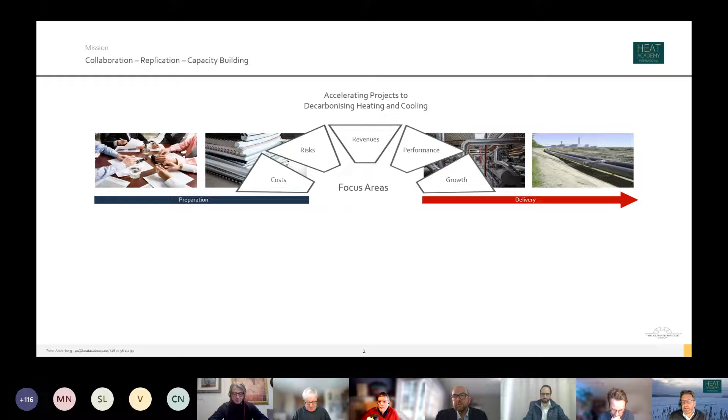The main blocks we need to address are the cost of a project, the risks, and to some extent also the revenue model to make it commercially viable. This, with our various set of services, is what we try to address, and today we are operating from this platform of training activity. So I'm going to focus on that.

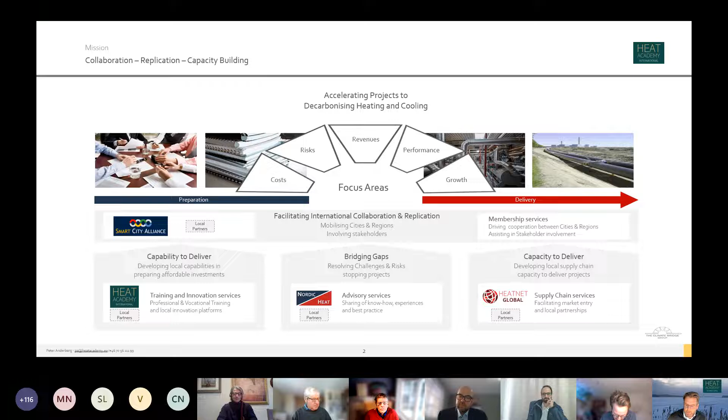Last time we looked very much at the question of why it makes sense to implement these solutions. We'll cover those questions again today to some extent. We also looked into the technology you can apply to capture heat, distribute it, and manage a heating system in a smart way. I should point out that the recording from the last session is available, along with the presentation slides we used last time, for those who are interested.

In brief, what we touched upon on the question of why is that heating is a very big chunk of primary energy consumption globally in the Northern Hemisphere. In an average city, heating is almost 50% of the total energy demand to keep the city going. In most cities across Central Europe, and I believe also in North America, this energy comes from gas, natural gas.

In many cases, you have a dependency on gas of over 90% to heat buildings in cities. And that dependency on gas for heating makes it that heating actually represents between 30 and 40% of total CO2 emissions in any city. So this is quite an important topic to address if we want to tackle the climate emergency.

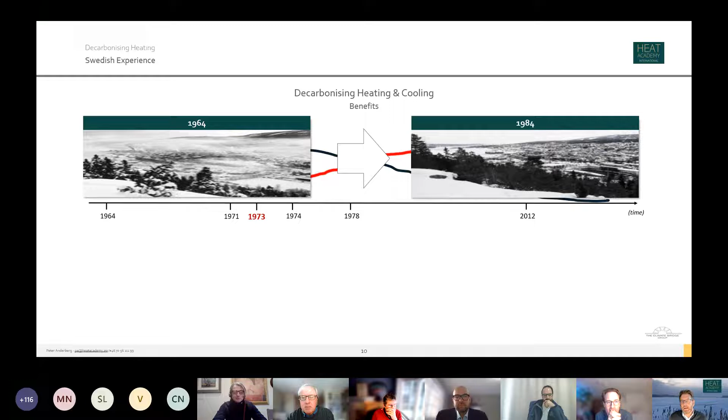This has happened before, and I'll come back to that further down the line in today's session. We had an energy crisis back in the 70s. What was done in Sweden and other Nordic countries was that we started to build heat networks, because they could address the energy security issues created by the oil crisis. But over time, we discovered there were lots of other benefits to building heat networks: in terms of balance of trade, creating local jobs, and improving the air in a community. So it was started by energy security concerns, but as we moved forward, we saw other benefits, and it has also proven to be a very profitable investment from a commercial angle.

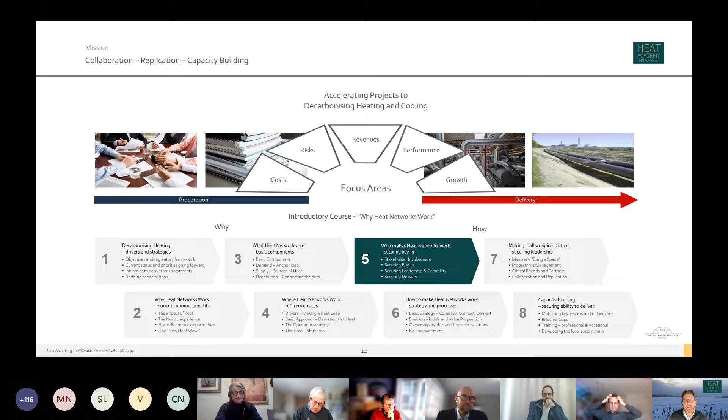Last time, we also touched upon the different technologies available at a high level, and what the best practices are - we'll come back to that in future sessions. Today, the focus is moving more into how to do this, particularly the stakeholder involvement section. To get stakeholders involved, we need to describe, in a sharp way, why it makes sense to make these investments. So we need to bring the conclusions from the last session into this one, to make a good story for why district energy is a good thing to do. This is basically what we'll focus on later in this section, which I am responsible for.

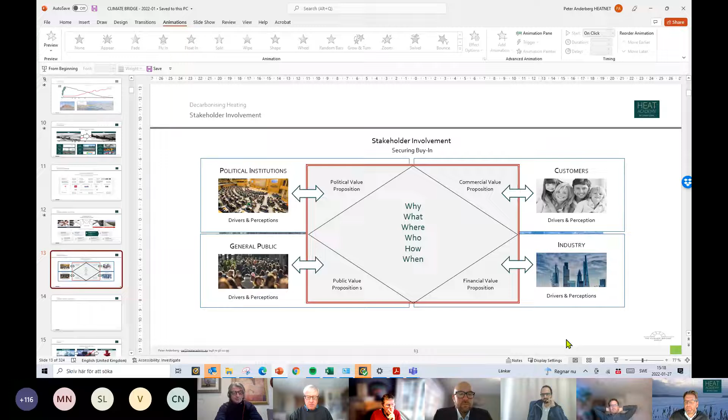But before we move into that, I'd like to introduce Jim, and step back a bit to look from a higher level again at the value of waste. So I hand over to you, James.

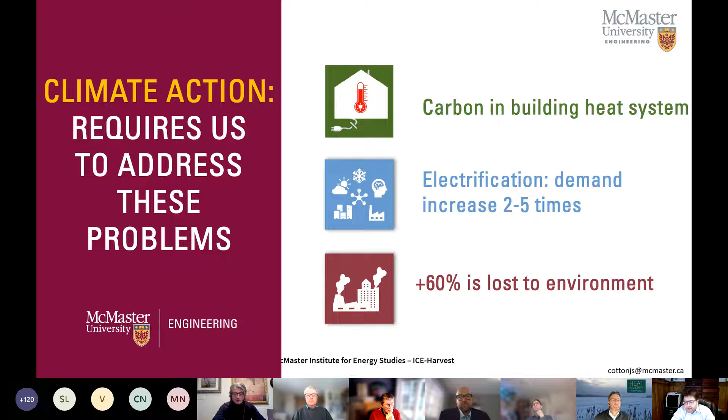That is happening at the same time as we're electrifying vehicles. But another problem is we waste more energy - more of our primary resources - to the environment than we actually use. So if we start to think about how to integrate this and look at these challenges together, we actually have a pretty good solution toward tackling this problem.

This is a slide to give you an idea of where we are and where we're going. The black line here is our electricity consumption in Ontario - it peaks in the summertime.

The red area here, that's our heating demand. It's cold, so our heating demand far exceeds our electrical demand. If you look at our peak heating demand, it's about 80,000 megawatts, and that's during those days when we have -30, -40 degrees Celsius. Compare that to our summertime peak, we're at 23,000 for the last few years.

Now let's electrify heating. I'm not going to get into this too much, but we have different COPs. Here's our average COP for, say, an air source heat pump with a seasonal average of 2. Here's an average COP of 3 — this would be a typical installed ground source heat pump. And then here's a higher one, a COP of 7.

If you look at the coldest day of the year, how is an air source heat pump going to perform? It's going to have a COP of 1, essentially equivalent to electrical resistance heating. We now have almost a 5-fold increase in terms of our peak winter demand. This is a challenge we have to address and understand. It's not just the amount of energy, it's the peak energy that we have to start thinking about and addressing, and we have to do that now.

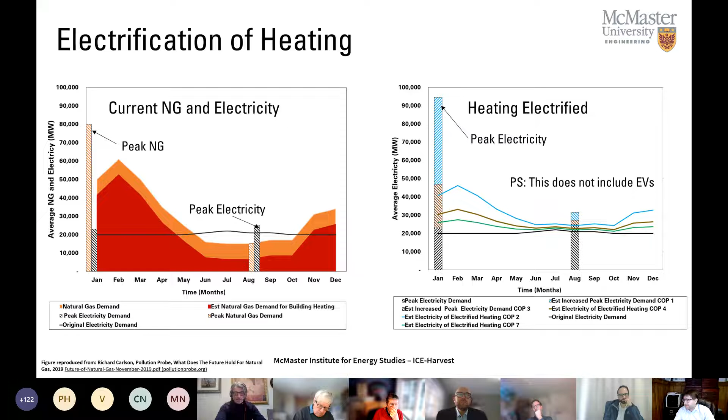By the way, this doesn't include EVs. There's an issue here — we're doing this across all sectors, and this doesn't include industry. So what happens when we include all of that?

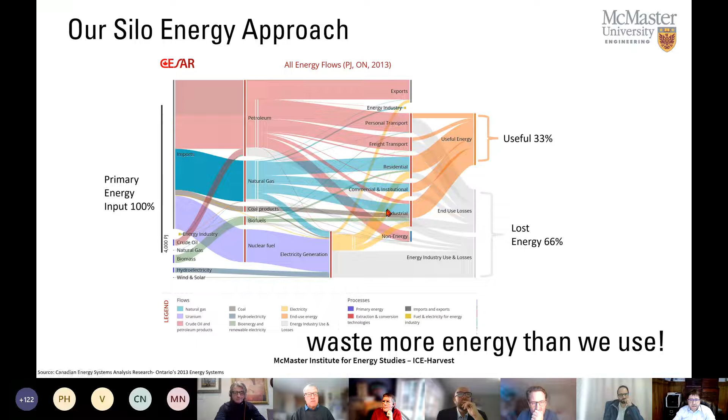Well, the other thing is we waste — we waste a lot. This is Ontario. This is sort of old data now; unfortunately, CESAR doesn't update their visualization reports anymore, which is really sad. But if you go back to 2013, it hasn't changed that much, aside from this gray line of coal being completely gone from our energy sector.

We basically used, of primary resources, 4,000 petajoules. What does that mean? That's 100% — let's just keep it at 100%. We used about 33% of that. The rest was lost to waste heat. So if we look at that and break it into numbers and relationships, those Sankey diagrams...

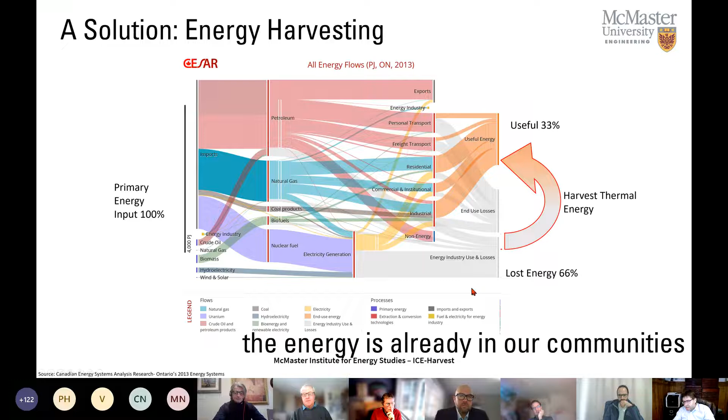Essentially, if we were able to reuse some of that waste heat, what would that mean? How much is it? What is available? We need to start mapping this. This was done from a top-down approach with our research partnership on the ICE-Harvest project, and it gives you an idea of the total waste.

If you look at industrial waste, it's definitely the highest opportunity — commercial too. We're talking 64 terawatt hours of thermal energy, 30 terawatt hours of thermal energy. In our study, we focused on these ones because these are going right into our community — directly assets we can use right now to start decarbonizing our heating using these wasted resources. Sum all of this up, and we have 130-plus terawatt hours of wasted energy already embedded in our community. Our heating from natural gas right now is about 191.

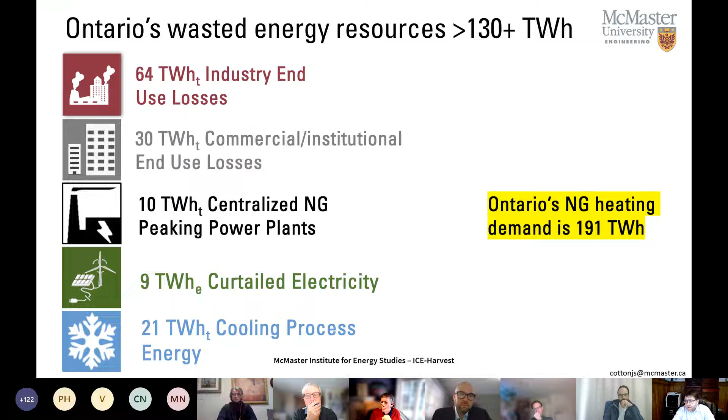You're talking right there — if we could harvest 50% of this, just 50%, you're reducing carbon emissions and going directly to our targets, essentially exceeding our targets by 2030, 2035.

Now, this payback period got a little bit worse. I did some projects with big industry partners in Hamilton, and these numbers started to creep up to 2.5 to 3, and it was harder to do. But what we did is a full energy balance on the entire plant, and what we found was, yes, there's high quality energy with good payback periods.

What really incentivized them was not the payback period, because of the huge capital cost up front for some of these projects, but the increase in productivity that led to better resource allocation and better quality in terms of their products. That's some of the things you could do with heat recovery.

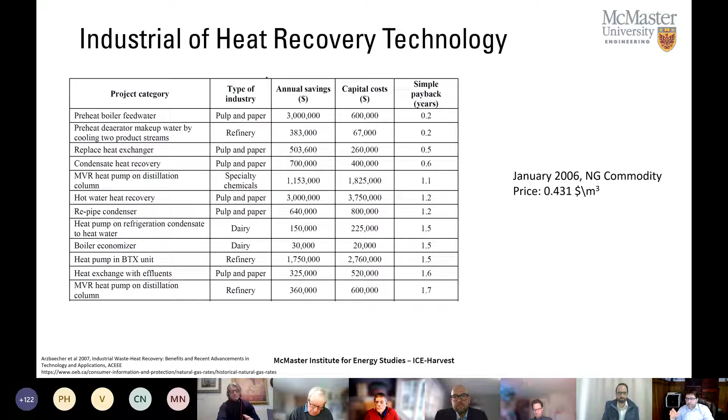One thing we did for a strip mill was investigate preheating their ingots before they went into the furnace. Instead of letting them cool down, keep them at 200 to 300 degrees Celsius. Right off the bat, it's about 15 to 20% savings, with a good payback period of about 3 years. But what really sold them on it was the increase in quality and productivity. In fact, they hired the student who worked on that project to continue working there.

Another one I'll mention is my own company. Look at the commercial side and think about how much we waste—this is far worse than any other process we've talked about. Look at our cooking processes.

Pizza, for example, is a company we partnered with, and they waste 90% of the natural gas—50 cubic meters a day, every day, summer, winter, fall—and 90% of that goes up the chimney. We've developed a system that integrates their electrical system, their hot water system, and even preheats the air going to the system. We've reduced consumption to about 43, and now only 40% of the waste goes up the chimney. This has a payback period of about 2 to 3 years.

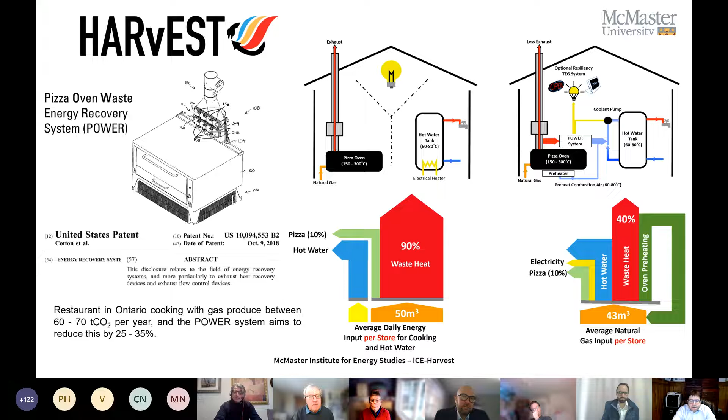And this is 2 to 3 years at prototype costing, not commodity or high volume costing, so it's still a challenge for them to do. But what we've proposed now is a rental energy sharing model, and this has really taken off. We look at a 10 to 15 year lifespan of the product—if we're able to install it for free, this is something they really think is going to happen. This services markets that typically can't afford high quality, expensive materials to do this energy harvesting.

Now, what is motivating this? Well, we don't have the same problems as Europe—our cost of natural gas is fairly inexpensive. The number I showed you before, the 2006 numbers with about a 1 to 2 year payback period, we're only now in 2025 going to be hitting that, and that's really thanks to a carbon tax. So if you're stressed about a carbon tax, just think about 20 years ago, before fracking, and the cost of energy then.

Here's our projected carbon tax, our delivery charges with inflation, our projected natural gas commodity costs—not expected to go up much—our HST, and here's another price on carbon. So we're looking at essentially doubling the cost from where we are by 2030, and we have some significant motivation. If you think about a 1 year payback period in 2025 using the 2006 numbers, we're getting into fractions. So right now, it just makes sense to do this.

But this also has implications on our home heating systems. And if we want to really target carbon emissions reductions, we have to think about how to do that. I'm going to give a very brief introduction—many of you have probably seen presentations from me on the ICE-Harvest system.

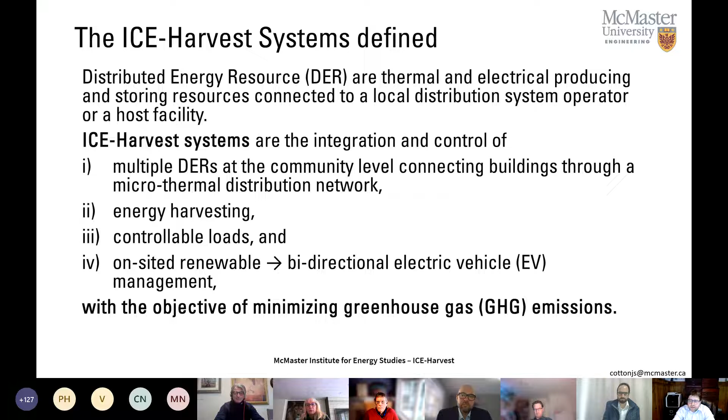That's really the opportunity. So this is a rendering of the ICE-Harvest system. It's very similar to a 5th generation district energy system, but much smaller. The key difference is that we vary the temperature of the system.

By varying the temperature of the system, we can fuel switch on the fly within 15 minutes to half an hour, running a CHP system as a decentralized peaking power plant during the day, following grid requirements rather than site requirements. So you're offsetting central peaking power plants that are 42% efficient, replacing that with something 80% or higher efficient, and delivering heat through a microthermal network.

Our goal is to export energy so we can support the rest of the community's high intensity loads, especially as we start to electrify our vehicles and geothermal systems in the neighborhoods around us.

We could store some of this energy short term. Then at night, when we turn off our CHP, we reduce the temperature of the system and electrify heating using heat pumps. These heat pumps could be bidirectional. For an arena constantly dumping thermal energy, we could capture that and put it into our system. So we do direct heat exchange during the day to save electricity, and heat pumps at night increase the electricity use 2 to 4-fold.

So now we have control. We're creating these loads - this arena could share energy with the pool next door, or with this community center. Community centers or libraries have data centers, and we'll integrate the data centers. There may be certain times they're using energy to heat the building, or internally taking the waste heat from their data center and heating the building. But if there's too much, give it back to the community.

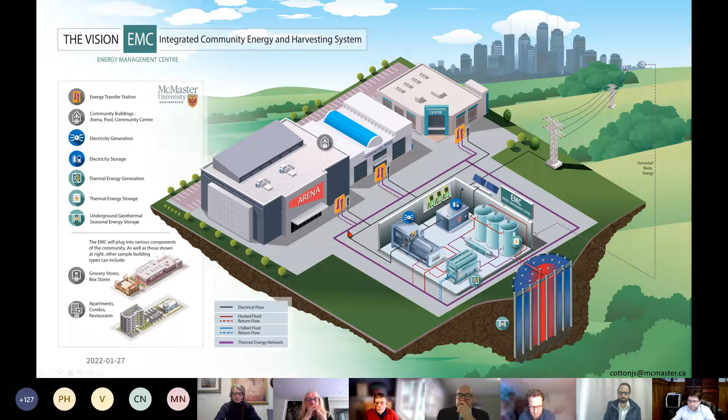Here's an example of a community campus. It's only 4 buildings, maybe 5, since we know they're going to be building a couple condo towers just down the street. The diameter is less than 1 kilometer, about 1.5 kilometers if you include the condo tower. We have an arena that's dumping energy, and a library dumping energy all the time through the cooling towers.

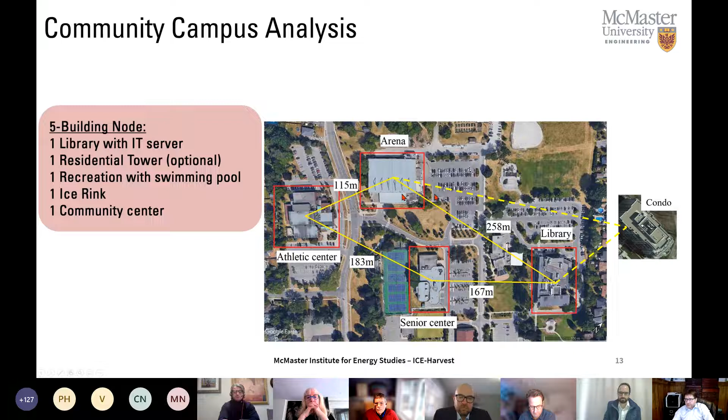So if we just put this microthermal network in play and integrated this, what happens? Well, your business as usual carbon emissions is about 2,200. If you just start sharing energy from those 2 buildings, it goes down to 1,300. We add a CHP system and operate it as a peaking power plant - we can play with that, doing it behind the meter or in front of the meter - reducing that down to...

870. Now we go one step further. Let's add seasonal storage - now we're down to about 65% less than the business as usual case. If we look at all the sites in Ontario we've identified through publicly available data, not even including industrial waste heat, just to be clear, we can basically reduce carbon emissions by 2.1 million tons. That's a significant amount.

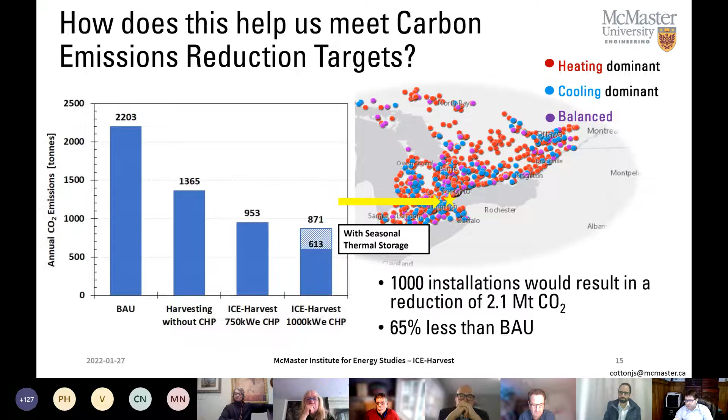And if you look at our targets to 2030, that's completely doable. Now, how much is that? It's about 1 gigawatt of installed capacity, averaging about 1 megawatt size systems. It seems like a lot, but that has already happened over the last 15 years in Ontario - we have CHP systems running 24/7 behind the meter, essentially doing the same thing.

Now, the next phase of our research project is really looking at mapping the additional opportunity around waste heat. And this is a study - sorry, I have to put the reference on it. I forgot, or it didn't.

It's not on this slide, but I'll have that in the slides when they're available, from Rotterdam, Netherlands. I love it, it takes forever to explain, but something I want to do eventually - essentially this is your heat map.

So the blue is the demand, and then they're looking at opportunities for non-carbon based solutions. So we have solar thermal roof collectors, they're looking at road collectors, point sources, and then geo exchange systems, all mapped to the city, and looking at suitable storage.

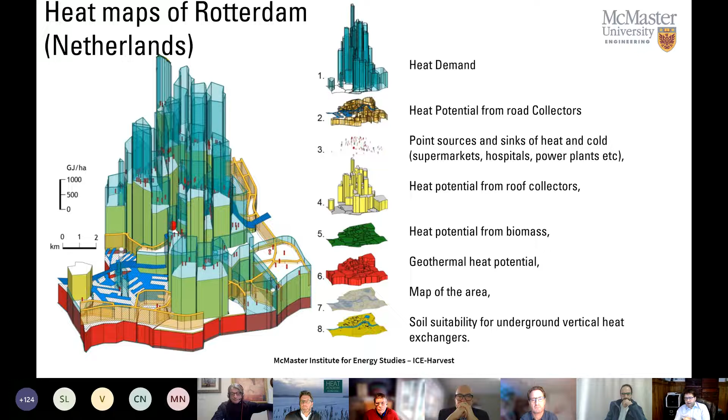We need to start doing this in Ontario. We need to map out, in particular, our point sources and our loads and show where these networks belong. They don't have to be monstrous district systems. We have a built city, but if we started doing these microsystems, eventually they will connect.

So the ICE-Harvest system is actually a grid modernization asset, not necessarily a district energy system. It focuses on harvesting, it focuses on sharing, it focuses on electrification, but it's really a DER asset that I think should be controlled as a grid level asset.

And that really brings us into this distributed system operating model, where a lot of it is controlled by our LDCs. As we get more and more DER assets within our communities, they need to be managed, and I think the most logical is through a distributed system operator and our LDCs. It also provides resiliency, and I think there's going to be significant value to that moving forward. We've seen this in Western Canada, floods, fires, and we've seen this in Burlington, so that's a key element.

And then it provides ancillary services, right? We're a dispatchable source, dispatchable load. You have ancillary services such as power frequency control.

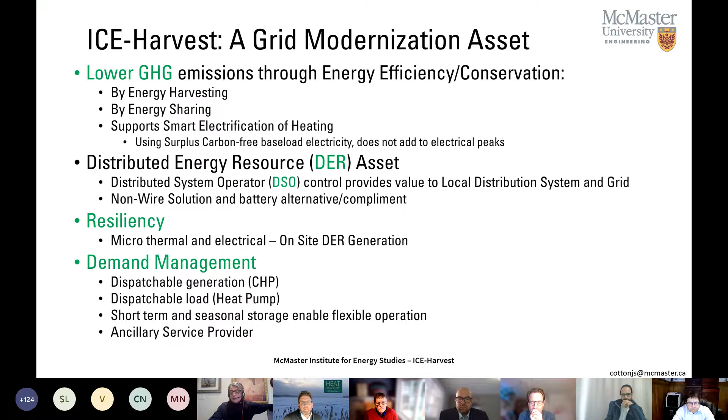So final remarks: energy harvesting is critical. These thermal networks and realizing the opportunity to share your energy - which I know doesn't really happen yet - sell your energy through micro financial transactions, get carbon credits, is key. I think we really have to step up our building code, buildings need to be low temperature HVAC ready so they can harvest this solar energy, this waste heat recovery.

That's something I've talked to everybody about lately. We really need a national energy harvesting strategy. We need to map this community waste. We have to realize it's a resource and bring it together.

And finally, just as a personal note - back on December 3rd they came out with the pillars of the climate plan for 2030, and the pillars were essentially net zero electricity, net zero vehicles, oil and gas caps, and emissions. They completely left out the building sector, and as Peter said, this is 30 to 40% of our carbon emissions. I think it seriously undermines our ability to meet these targets if we don't really start focusing on addressing these goals.

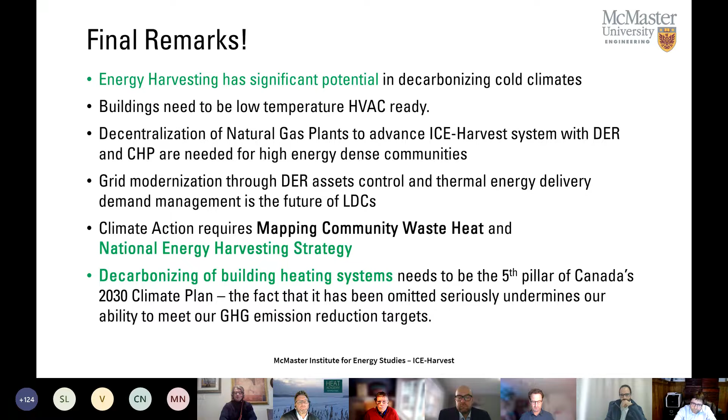Now, last, I just want to thank the team. We've had over 50 people work on this project - graduate students, postdocs - all the ones highlighted are off in industry now. Actually, I see a lot of the partners have hired these folks. They did all the real work.

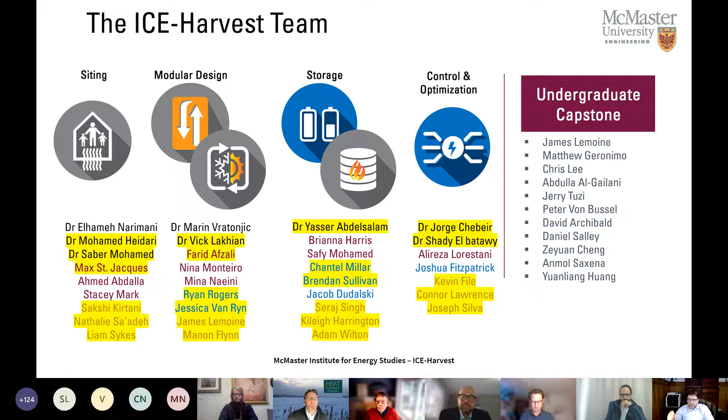And finally, my industry partners - HCE in particular has taken a big leadership role, and Grid Smart City. But to be honest with you, it is amazing - we have all sectors of energy delivery, from district systems to thermal energy delivery partners, to geo partners, and our LDC partners, all working together to make this project happen. Thank you.

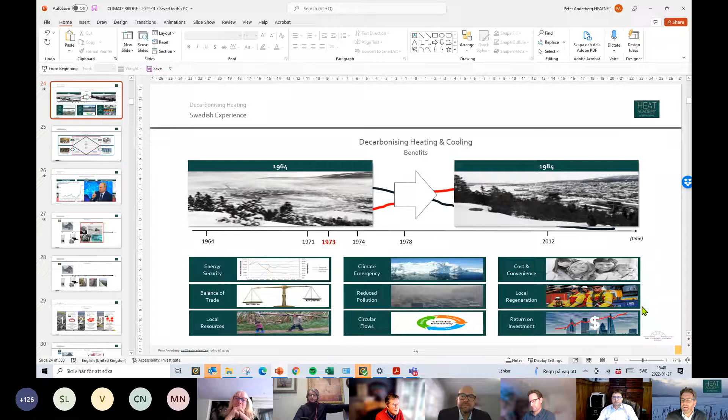As I mentioned before, we could see in the Nordic region building these kinds of systems that we've been talking about so far, with lots of benefits. They often start for a specific reason, and I'll come back to that shortly. But there were benefits that nobody could foresee - that it would be profitable, that it would be a way of generating jobs and keeping jobs in local communities, reinforcing the competitiveness of local industries, but then also having social impact.

What is interesting now is we have an enormous energy crisis in Europe emerging, and costs have gone up dramatically in recent months. Those connected to district heating in Sweden haven't been affected at all, because all the heat used for heating buildings comes either from waste heat sources, industrial waste heat, or biomass. That's an interesting aspect, that this is a way of creating less turbulence in your cost of energy.

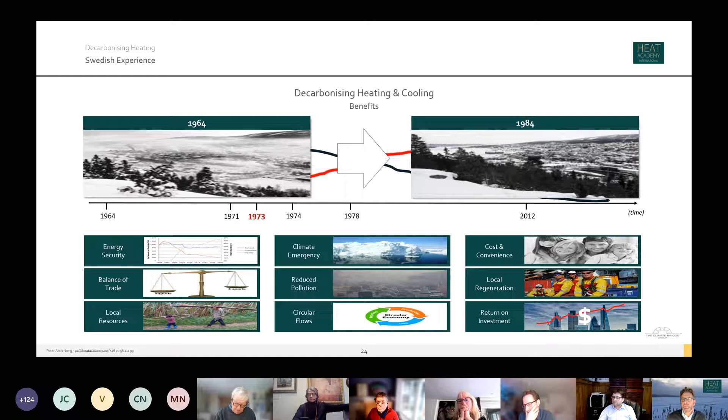Everybody wants these benefits, obviously, and everybody can understand that putting a joint system in the ground will give benefits like the ones we've heard about. The challenge, however, is very, very big to do it. The technical challenge is nothing - this has been done for decades. If anything, it's easier to do today than before, because you have better equipment, better technologies. You can do it in a much safer and better performing, sustainable system.

The real challenge in these kind of infrastructure projects is stakeholder involvement. I prefer describing it as stakeholder involvement compared to stakeholder management, which is often the term used. I think involvement is exactly what you need - you need to involve different stakeholders, who in different ways can benefit from the system, and make them understand the opportunities, to secure the buy-in from these stakeholder groups.

In the coming presentations, you will meet representatives from various stakeholder groups. We have basically four core categories: political institutions, and obviously the end users, but also developers and real estate companies that we label customers.

We have the general public - how do they regard these projects? We need to be able to explain why we're creating congestion in the street and putting pipes in the ground. We need people to have an understanding of why we do this.

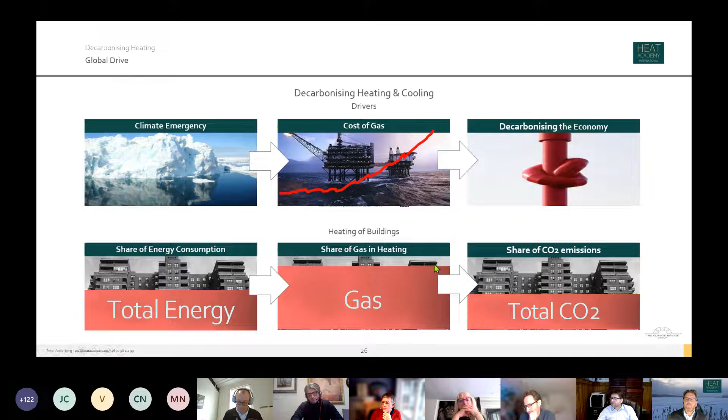We can see it clearly today in Europe, and I come back to this picture - the climate change, and everybody has declared climate emergency and so on, but it doesn't really lead to practical impact of people going out in the street and putting district heating pipes in the ground.

Basically, this is what's happening now because it's getting very cold in many places in Europe. There is a shortage of supply, prices are going up, and you can't really afford to keep the temperatures in the houses. There is a risk this will happen again.

It's interesting because this is what happened in the Nordic region back in the 70s. History is back - we are back to where we were 50 years ago in Sweden. This is a very short but personal story.

This is the house where I grew up. When I was a kid, we carried logs up the stairs and we had individual fireplaces in different rooms - we didn't even have central heating. In '71, we installed central heating, and that was dramatic in itself. People objected to that - why would we need that? But we did that, and most Swedes did, and also in Finland.

And then in our house, like in most others, they used oil to heat the house. And we ended up with another crisis. In those days, it wasn't Ukraine, it was down in the Middle East - the oil crisis, and prices shot up overnight basically. It became quite clear to everybody that this is not sustainable.

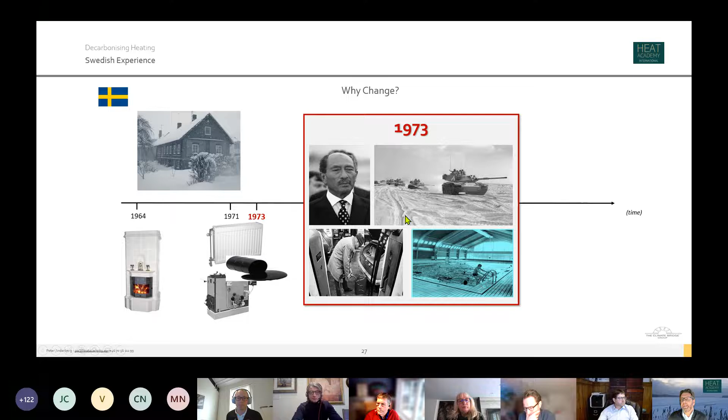Sweden in those days was like most cities in Europe today, and also in Canada - not using gas, but addicted to oil. Most buildings were heated by oil boilers, and none of that was produced in Sweden. So we had to find another way. And what happened was basically a strategy that we still talk about today.

We still advise people on this, and it's still used. The first thing we did was conserve energy, making investments in energy efficiency in buildings to reduce the demand for heat in the first place, changing windows and so on.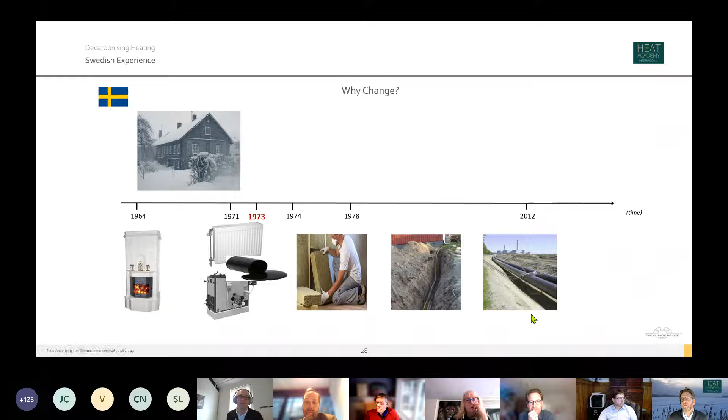Parallel to that, initiatives were taken to start putting pipes in the ground to create small clusters of heat networks - what we call donuts in the industry. Initially these donuts were heated by a shared gas or oil boiler, but over time, as you created more donuts, you could connect them to each other, and then suddenly you could start using bigger sources of heat.

So over time, with this strategy - conserve, connect, convert - the house where I grew up is now connected to a large heat network in the south of Sweden, using multiple sources of heat, primarily waste heat from different processes. One source comes from a local company in the city called Kemira. For several years, Kemira used to send the waste heat out into the sea, but since many years, they rather sell the waste heat to the energy company in the city. I will not spoil the story.

I'm going to talk about the example of Helsingborg, where since 1974, 48 years back, we've been collaborating between industry and the local energy company around what we call residual heat. I work at a company called Kemira Kemi, part of the global company Kemira Oyj, as manager for energy and sustainability.

Just to give you an idea of where we are in the world, Helsingborg is located in the very south of Sweden, marked with the red dot. To the left here you see an overview of our site in Helsingborg, and below, the office. Unfortunately I haven't seen it for quite some time due to the COVID situation, but I'm really looking forward to going back.

Just a few words about Kemira, the company. It's a global company in the chemistry business. We work with two customer segments - the pulp and paper industry, and the industry and water segment. You have some financial KPIs there - we're about 5,000 employees, with sales to about 100 countries, and production plants on most continents.

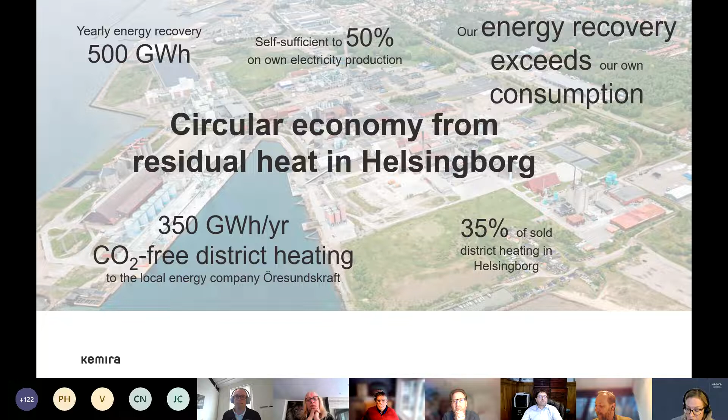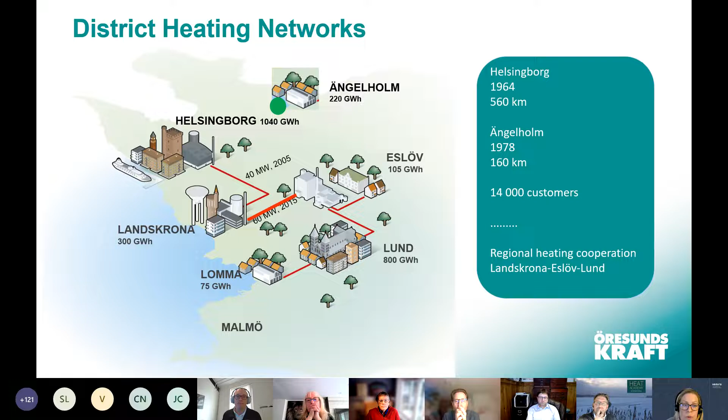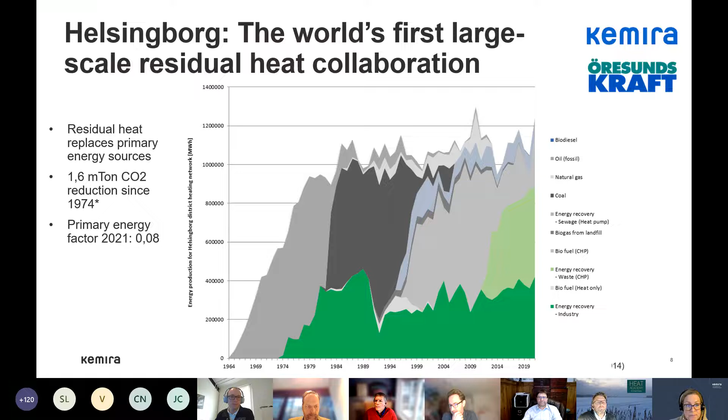Yeah, so Peter was mentioning this as well, but yes, for sure, it has been a win-win-win situation. There is a capex avoidance in energy production plants. Our 55 megawatts of heat delivery does not have to be invested in, or maintenance applied for that type of volume. So there is a huge capex avoidance by collaborating like this.

It also provides stable and competitive prices to the district heating customers, and for us as an industry, it provides a very valuable additional income, or a reduction to our production cost. That is very important. We as a company are competing on a global market, and the competition is quite fierce, so if we can get an income outside of our core business to reduce our production cost, that is obviously very important. And not the least, the GHG emission reduction that we see from this.

Some success factors: what is the key to succeeding in collaborating like this? Well, we have always had profitability in focus, so this is not a PR project or anything like that. This is profitable for both parties.

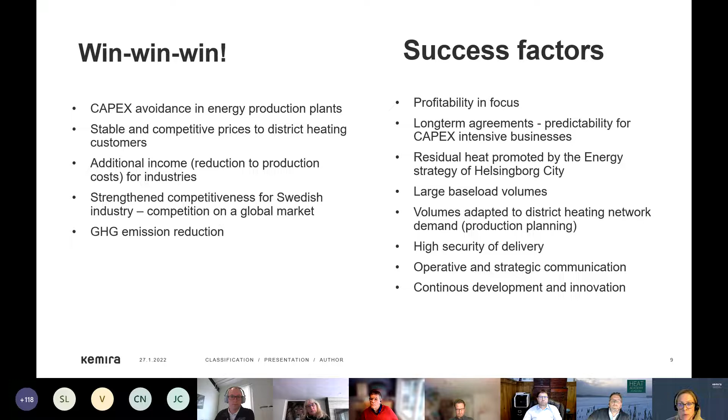And I think that was all I had to say for now. If there's any questions or thoughts, feel free to contact me or Peter, and we'll try to get back to you.

Thank you so much, Emma, for this great presentation. And I will immediately hand over to, should we call him the customer of you for the waste heat, the energy company. Without a local energy company having pipes in the ground, you can't do this, can you, Göran? No, it takes a pipe network to make a city. You need the district heating system to make this work. That's for sure. So most welcome, Göran. You're representing Öresundskraft, which is the municipal energy company in the city of Helsingborg.

Hey Emma, I have a question, great presentation. Is there time for a question? Do we have time for a question? Peter, that's a question for you. You're muted. I think we've agreed we take questions at the end, or what's your view? Yeah, if we could just put that off to the end, and if not, we can do it in writing. Don't want to miss your question, but we've got a lot of content and time is passing. So if you put it in the chat for the time being, it would be great, and then we make sure we keep it in mind. Okay, thank you. Super, thanks.

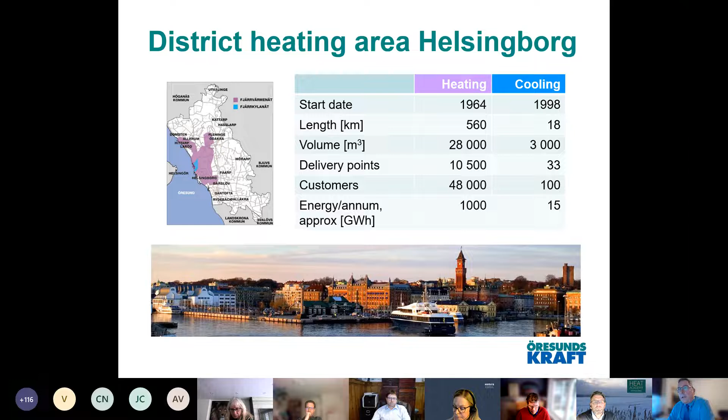First of all, the city of Helsingborg, as Emma mentioned, specifies district heating as a base for heating. It's in the building codes when the city expands into new areas. Customers may connect or not, but there should be a possibility to connect. As Emma mentioned, it's part of the energy plan in the city.

When we do expand, we need to make holes in the ground. We will disturb traffic and a lot of things. So planning and communication together with the city and the people who handle streets and traffic is key. I would say we meet them every week and talk about what's next, where we want to dig, and how long, etc.

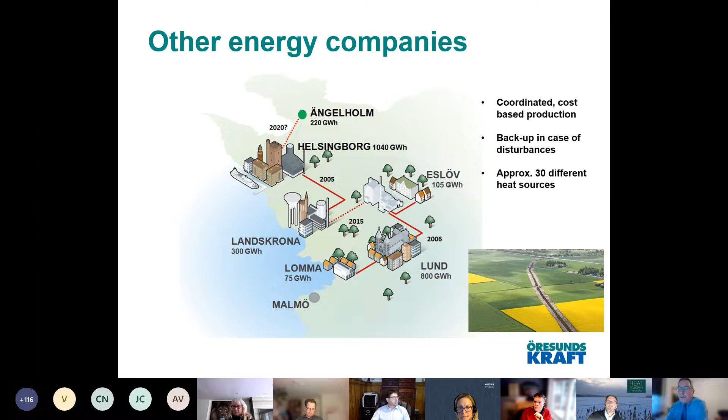So with that very short presentation, I want to show the power of district heating. It can do great things. It can do many things. And that concludes my presentation, Peter.

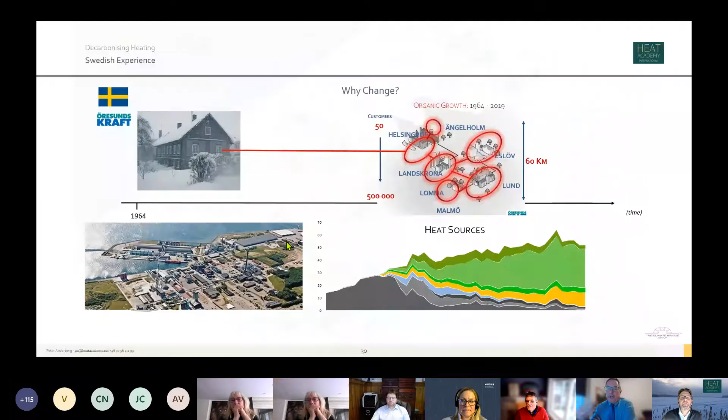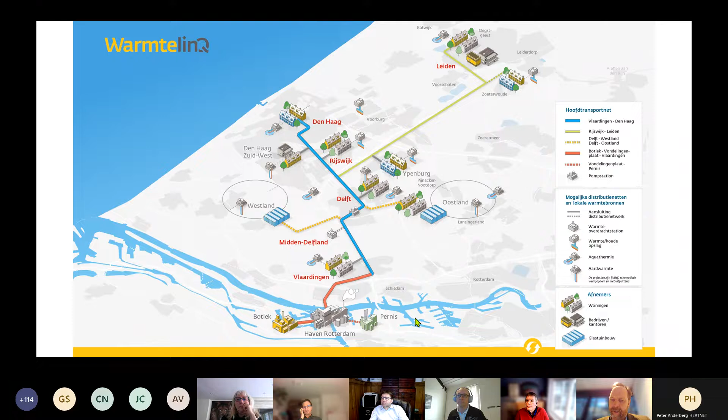It's a project that is run by GasUnie. GasUnie is the Dutch TSO for natural gas. And well, for several good reasons, GasUnie has decided to step into this project with the objective to connect the industrial area around the harbor of Rotterdam with district heating grids in the province of Zuid-Holland.

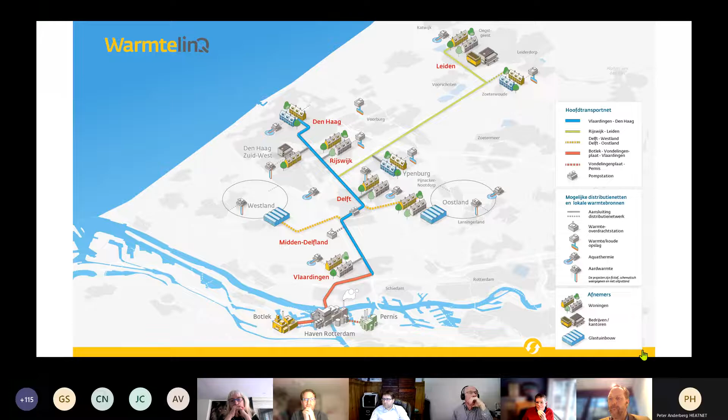What you see here is a nice graphic, of course. The big, I don't know, can you see my cursor? No, you don't see my cursor because I don't present this. I'm going to steal your screen. Please just take the screen. I hope this works.

Yes, clear and visible. And do you see my cursor now? Yes, good.

Okay, so below we have the Rotterdam Harbor, which is in fact going along the coast. So there's a lot of industrial activity here, but the project will start here in this area, and it will, the first chunk is in fact from the harbor to the city center of The Hague. And that is 700 millimeter piping, and then going down towards the end in The Hague with 500 millimeters. It's quite a long shot. This distance is roughly 40 kilometers in piping.

So that's quite something. And towards Leiden, this is still in advanced study, would be even 15 kilometers longer. But the first bit, we have now recently taken the final investment decision, so this will really be built.

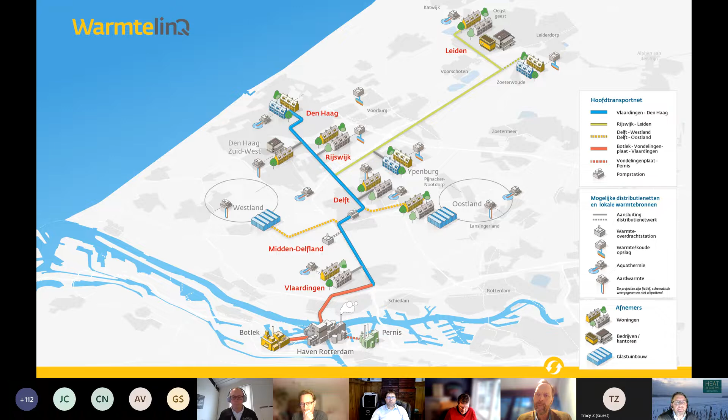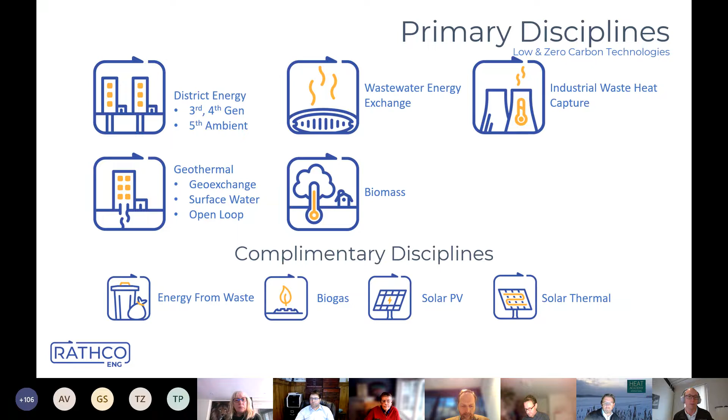I'm here to talk about some of the work we've done locally to take some of this international best practice and bring it into the Canadian market. For context, we're a firm that focuses on third, fourth, and fifth generation district energy systems. We also focus on the sources of energy, and we've specialized in all of the low and zero carbon sources, mainly wastewater energy, industrial waste heat, which is what we're going to be talking about, geothermal and biomass, but we also complement these with some complementary disciplines like energy from waste, biogas, and various forms of solar.

We work in 5 major markets. Obviously, utilities and municipalities are at the forefront of what we're talking about today, but we also work a lot with real estate developers, indoor agriculture, and colleges and universities. The previous speaker was talking about constraints of capital - this is one of the reasons real estate developers is one of our largest markets, just because our municipalities are funded very differently here in Canada.

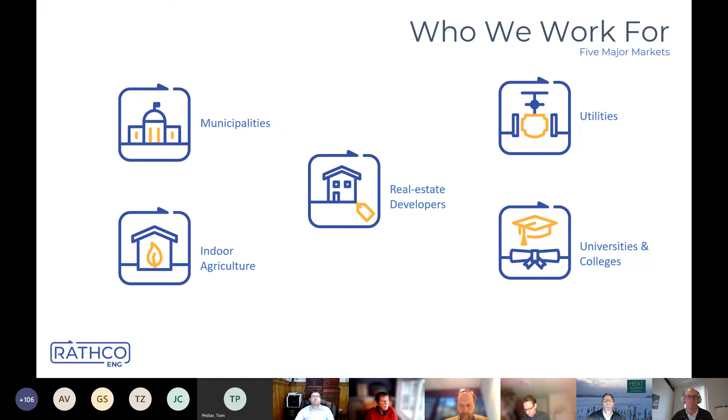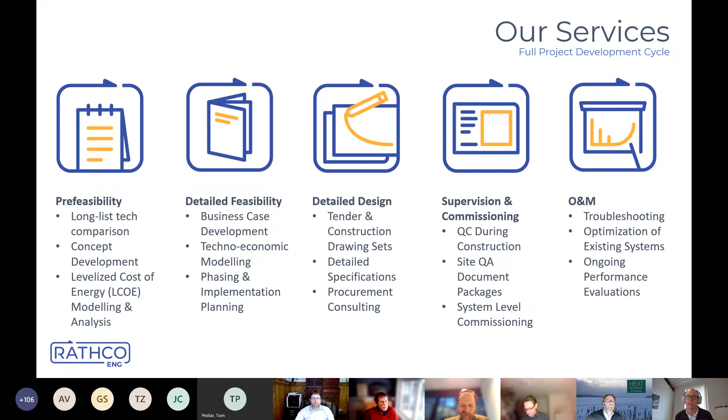Another thing that's important to know is that we do the entire life cycle of a project, from early pre-feasibility all the way through to detailed design and site supervision, operation, and maintenance. But let's get into what we all really want to talk about, which is the Zibi project.

This is one of our very first projects. We've been working for them for 3 years now, and this is a Dream developer - the developer's name is Dream. The location is in Ottawa, Ontario, but technically it's also in Gatineau, Quebec. They created their own district energy utility company called ZCU, the Zibi Community Utility. ZCU is a partnership between Zibi, the development, and Hydro Ottawa. This created a very advantageous relationship so they can leverage the opportunities the private sector provides, but also gain access to public sector opportunities through Hydro Ottawa.

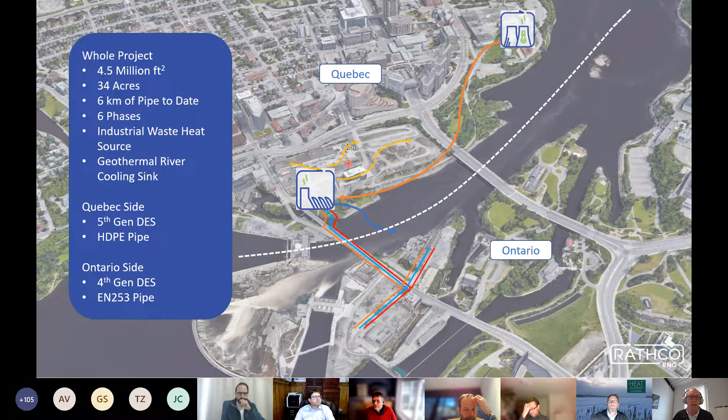Another part that made it really interesting is in order to get these 6 pipes into Ontario, we had to design and coordinate a lot of bridge crossings. So there's 1, 2, 3 bridge crossings, and then we had to work with some great structural engineers at WSP to develop a cantilever bridge support system, because we had to suspend these 6 fairly significantly large pipes out over the river's edge so that we could get them underneath this large Chaudière bridge. This has been a very great engineering challenge for us, but I think it really demonstrates what's possible and that we can do some really great things here in Canada.

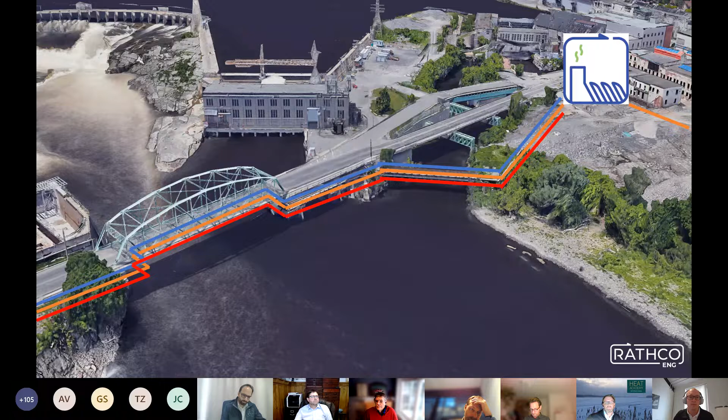The site had additional unique site conditions that presented some great challenges that we overcame on this project, some of them being the very multi-phase nature of the project. We were able to adapt to the developer's needs so that we could minimize the amount of capital that's front-loaded at the beginning of the project, so that the capital being deployed for the district energy system is much better aligned with the deployment of capital with the development.

We also mentioned the bridge crossings. The other thing that was very interesting was this island has no soil on it - it's essentially a giant rock. So this made excavating and some of the engineering details a little bit unique. This is a picture of the seasonal flooding that occurred a couple of years ago - they had 2 100-year floods in 3 years, so maybe they need to update the definition of what a 100-year flood is. But this is definitely some interesting site conditions that have been navigated so far.

And then the primary trunk portion of the piping distribution system is in a heavily trafficked road section, so there was a very well coordinated 3-month shutdown of that roadway that we helped facilitate from a district energy design perspective. So this is all to say, if we can do all of these things, then this is probably as hard as it's going to get in Canada. So a lot of projects will benefit from this as an example, I would argue.

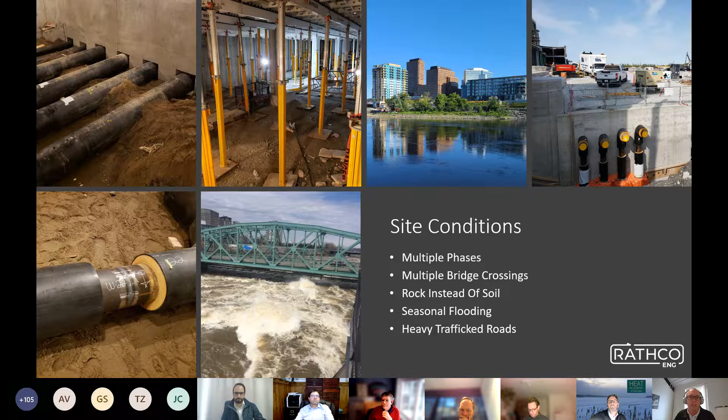So we did a lot of things for Zibi, and we're continuously expanding our scope as they learn more of what we're capable of. We do full tender and construction drawing packages coordinated with the other civil buried infrastructure services. Although shown as 6 phases, it's really been well over a dozen phases of tender and construction engineering deliverables.

So that we can facilitate that much more granular building by building approach, which the developer really appreciates. Again, we have very unique designs, you can see the pipes suspended over the river, and there's a beautiful shot here with the Capitol buildings in the background. It's a very great location. There's a lot of building penetrations we've had to coordinate with structural engineers and waterproofing engineers to make this all happen.

We also provide very detailed bill of materials and European procurement services. This pipe shown in these pictures is actually a special type of pipe meant just for district energy. It's called EN253, a European designed and certified product specifically meant for a long life cycle. When designed, installed, and maintained properly, you can achieve life cycles well beyond 50 years, and that's been a really big plus to provide this capability here in Canada.

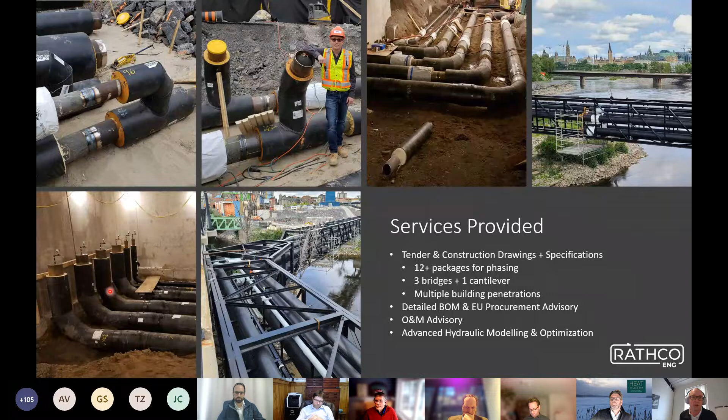As you can imagine, infrastructure is not cheap. So if we can help reduce the scale of that infrastructure, that translates into direct capital cost savings for our clients, which enables a much more sustainable business model to align with the sustainable carbon outcomes they're trying to achieve. So that's our Zibi project, and I'm happy to address any questions that come up as a result.